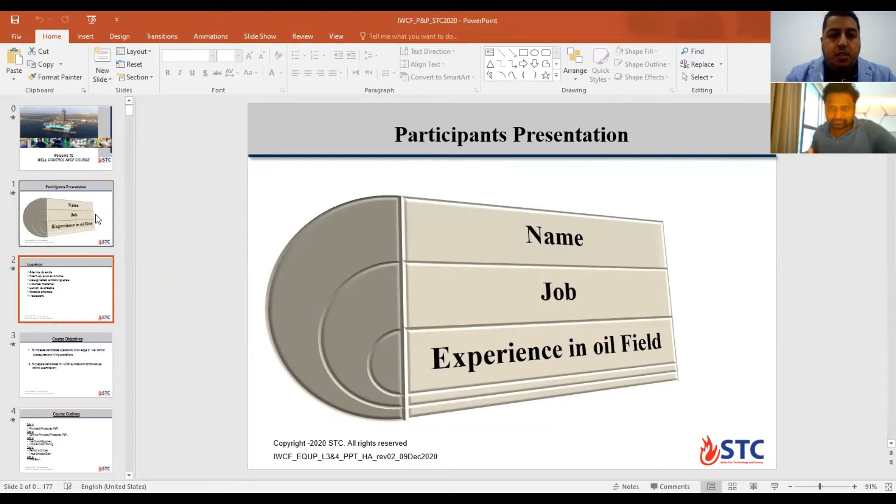This is well control IWCF level 4. We already made introductions about ourselves. Some logistics: the time will start according to Kuwait time, 9 a.m., and we will finish by 15:30. So total hours is 6.5 hours, including half an hour for lunch break.

Course material is with you. You need to have your passport during the exam for ID identification.

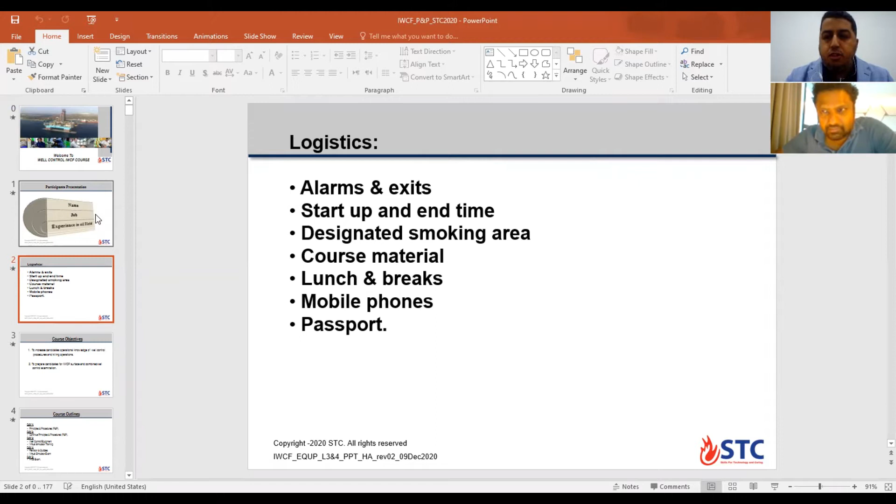What is the course objective? Why do we deliver or attend this course? First, to increase candidates' operational knowledge for well control procedure and killing operation - how to put the well under control, how to kill the well, and resume our normal operation. Second point, to prepare candidates for IWCF surface - our course is talking about surface and combined well control examination.

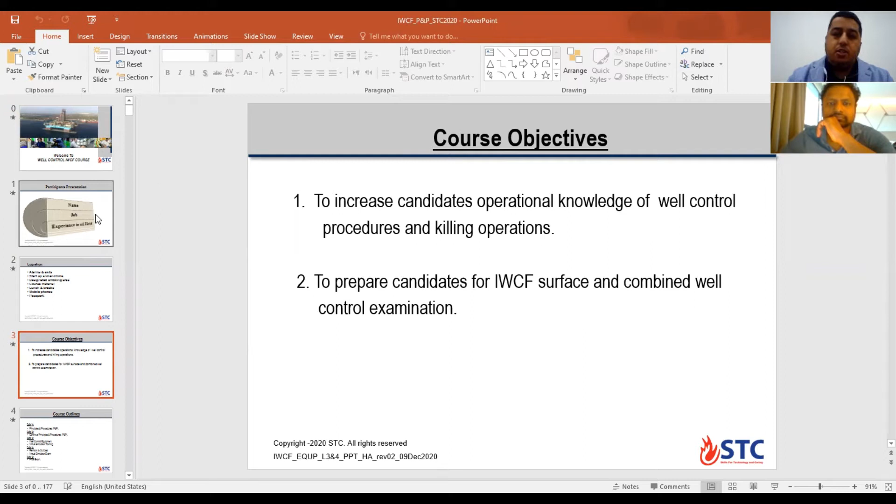Course outline: Day 1, today, for principle and procedure P&P. Day 2, continuing principle and procedure. Day 3, well control equipment - we will have virtual simulator training, well control simulator. Day 4, revision and quizzes in class, virtual simulator exam - you need to pass also with 70% to get your final certificate, along with the written or online exam. Day 5, the last day, will be the final exam.

And I think your exam will be online, right? Yes, it will be online. Okay.

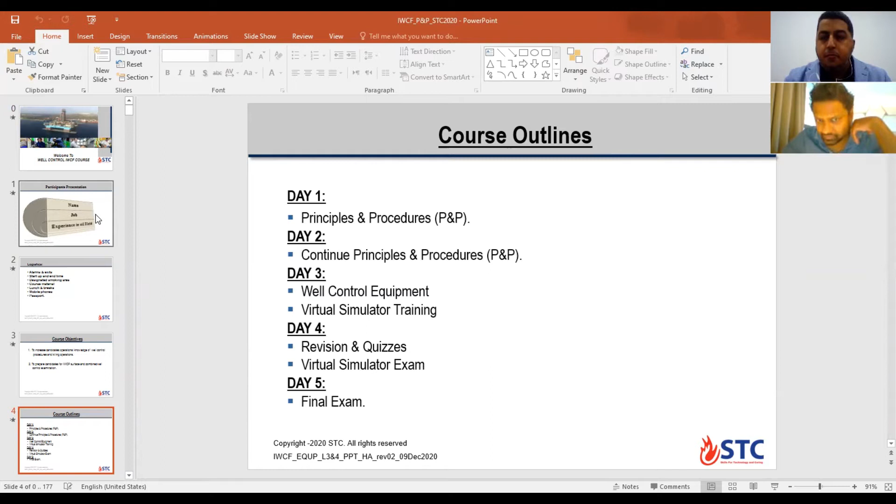First point, we'll talk about principle and procedure, P&P, well control barriers. Most of us working in drilling sites or drilling rigs know about what is a kick and a blowout. This is the definition, the most common one you hear at the rig site. What is a kick and what is a blowout? What do you think? Yes - kick is an influx, a blowout is an uncontrolled influx.

Thank you. A kick is an influx of formation fluid entering the wellbore and causing the well to start flowing. This formation fluid can be oil, gas, a contamination mixture between oil and gas, or formation water. So water can also be a kick.

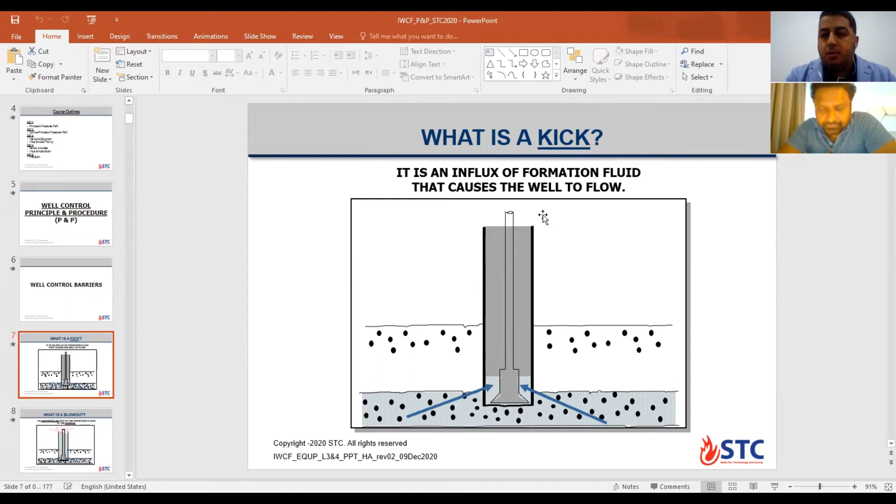Why does the fluid start to flow into the well? Because the hydrostatic head of the mud becomes less than the formation pressure. So the influx will be inside the wellbore but still under control - you can close your BOP stack at surface, read the pressure at surface, then convert this pressure into an increase in mud weight, and start to kill the well.

A blowout is an exit of formation fluid reaching the surface, out of control - an uncontrolled exit of formation fluid reaching the surface. You try to close your BOP stack but have failure in the BOP stack to control the pressure, so the oil and gas reach the surface without control. This is called a blowout case.

Normally, not all kick situations lead to a blowout. According to experimental data or experience in the oil field, only 10% of kicks, if not handled in a good way, can result in a blowout. The worst blowout in almost 11 years was the disaster in the Gulf of Mexico - the Deepwater Horizon semi-submersible rig.

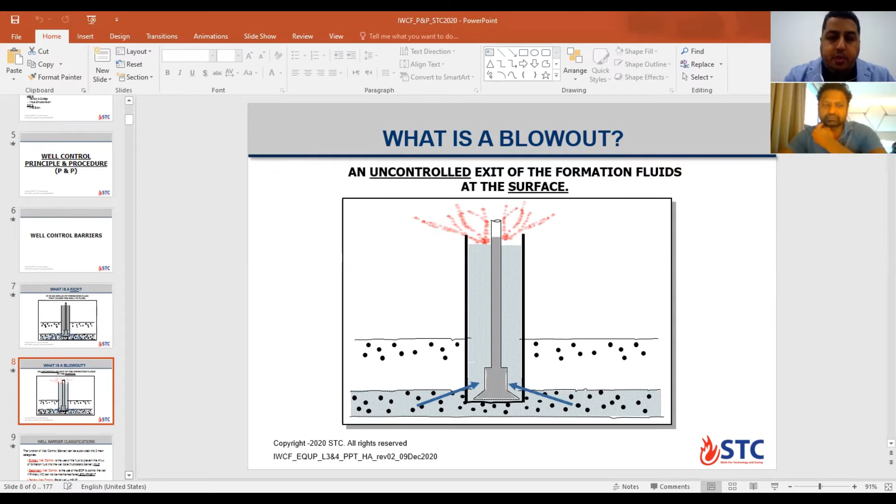Yes, correct. What is the barrier classification? Here we talk about barriers - something that can prevent the flow from the formation.

It can be divided into 3 main categories. First category, primary well control barrier, which is the fluid or the drilling mud, which prevents the influx from the formation coming inside the wellbore. This is called fluid barrier or hydrostatic barrier.

Usually when you're drilling, you drill with mud, and the weight or the hydrostatic head for the mud gives you pressure higher than your formation pressure. By minimum, according to the API, American Petroleum Institute, which puts some regulations, you have a minimum of 200 PSI overbalance. You need to have that minimum.

In some company policies, they can put more than 200 PSI according to the depth of the well, porosity and permeability of the formation, type of well, deviation, temperature downhole—a lot of considerations.

If you fail with the primary well control barrier, you switch to control the well with the secondary well control barrier. This is a piece of equipment called BOP, or blowout preventer. You will shut in with a pipe ram or annular to stop the flow and control the kick. At that moment, you record pressures at surface and convert these pressures to mud weight, increase your system with kill fluid, and start to kill the well with one of the killing methods we'll talk about later.

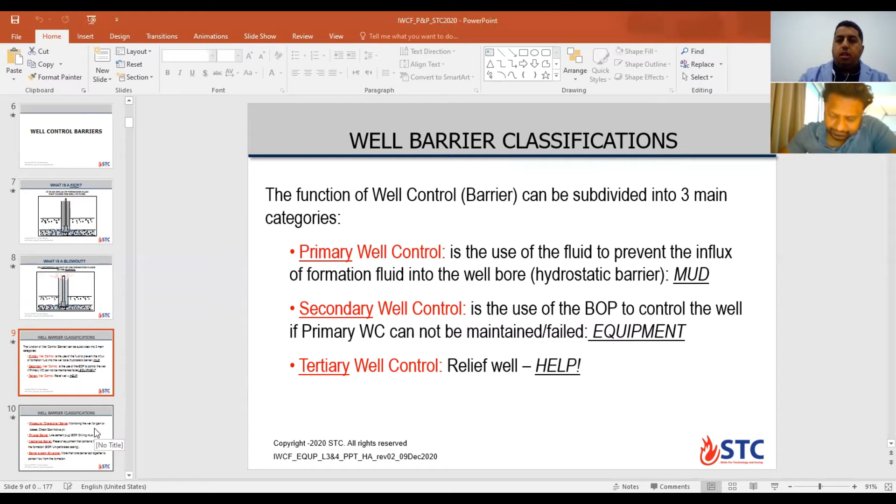Here's another classification, something called procedure or operational barrier. When you are monitoring the well for any gain or loss inside your tanks, checking active or gain in the tank—this is called operational or procedural barrier for your mud system.

Physical barrier, from its name, is something you can see or touch physically, like a cement block or BOP or drilling mud, if you can see it at the surface and the level is static. Mechanical barrier is a piece of equipment that contains the flow from the formation, like a BOP or unperforated casing.

Barrier envelope—what is the barrier envelope? This is a combination of more than one barrier acting together to contain the flow from the formation. Like when you are drilling, you have two: you have the hydrostatic head from the mud, and you have the BOP as a secondary barrier.

The same applies if you need to, for example, change the one ram in the BOP—you need to have one mechanical barrier plus your hydrostatic head from the mud. In some companies, they can add more barriers, but this is the minimum requirement: 2 barriers in place.

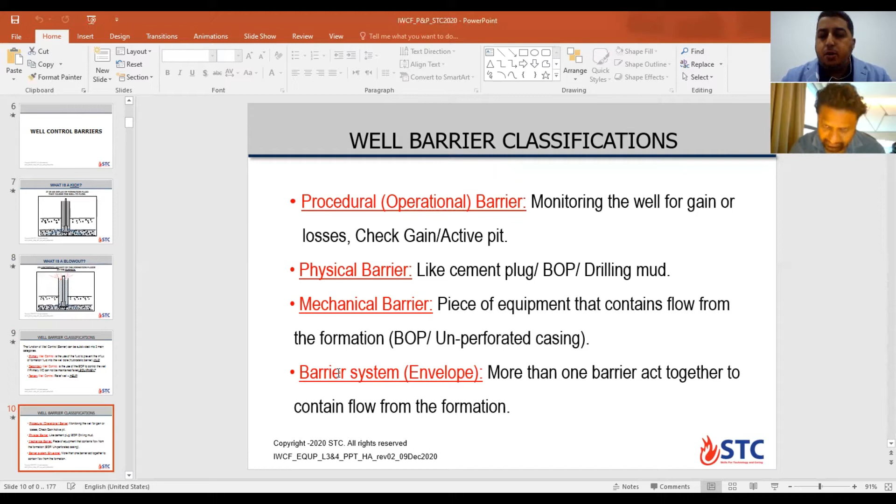How can we pressure test the barrier? The barrier will not be an acceptable barrier until it passes the test criteria or test requirement to be considered a barrier. The BOP on the rig, if you put it above the wellhead, cannot be considered a barrier until it passes the test procedures.

What is the way to pressure test the barrier? You have 2 pressure test types: one is called positive test and another is called negative test.

The positive test: you apply external source pressure on the surface side of the barrier, like a cement block or BOP, greater than the pressure from the bottom, from the formation side. At that time, your surface pressure plus your hydrostatic head column above the cement block in the well will be more than the formation pressure. So this way is called a positive test. You need to hold the pressure for at least 10 or 15 minutes on the chart to ensure the barrier is holding the pressure, so you can continue your operation.

In the other way, the negative test is sometimes called the inflow test, or in some companies the dry test. You do the reverse: you apply pressure from the formation side, the formation pressure, which will be higher than the hydrostatic head from the mud above the barrier. So this type is called negative test. How can we do this? You can displace the fluid above the cement block with a lighter fluid like water.

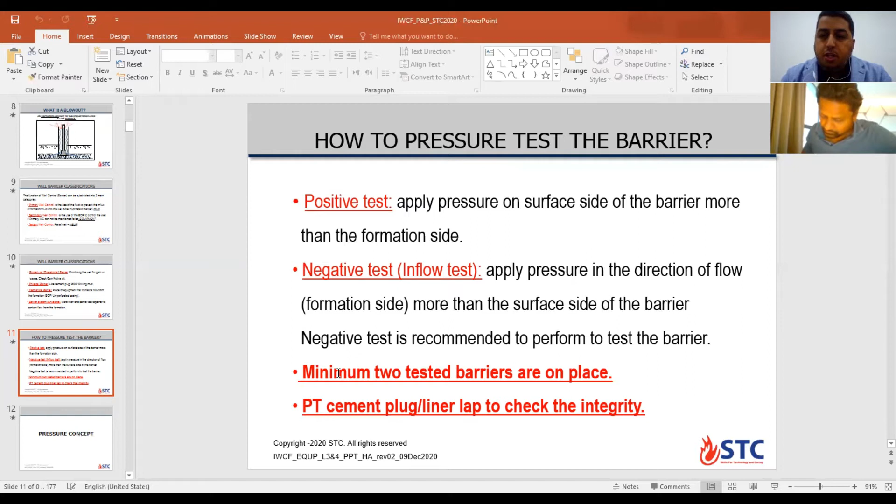We'll move to talk about pressure concept. What is the pressure we need to talk about? First, we'll talk about hydrostatic pressure, HP. Hydrostatic pressure equation, the units for this course, pressure will be in PSI, pound per inch square, equal to mud weight in ppg, pound per gallon, times TVD, true vertical depth, times factor K, which is 0.052.

This equation you will find in your formula sheet. Could you check your formula sheet? This is the first equation in the formula sheet, first page, number 1. Pressure equal 0.052 times TVD in foot times mud density in ppg. This is during the rest, during the static condition, without pump running.

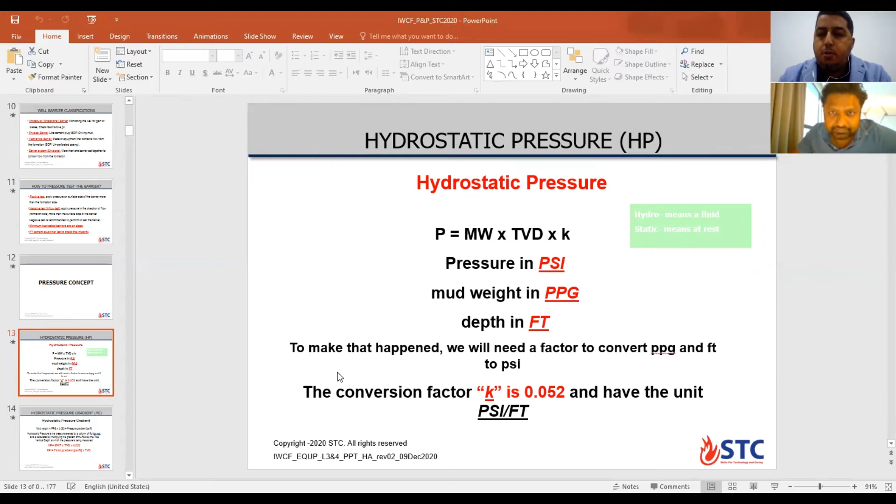So if you need at any point to measure your hydrostatic pressure, you need to know the true vertical depth, not measured depth, related to the pressure by 0.052 and the mud weight in the well.

Here we'll talk about hydrostatic pressure gradient. The gradient means the last equation, both sides divided by foot, so we'll get pressure for each foot true vertical depths inside the well.

This is the second equation: pressure gradient equals mud density times 0.052. The unit for pressure gradient is PSI per foot. This second equation is a general equation.

If you put fracture gradient in, you get the mud weight equivalent to the fracture pressure. If you put formation gradient in equation number 2, you get the mud weight equivalent to the formation. So it is a general equation.

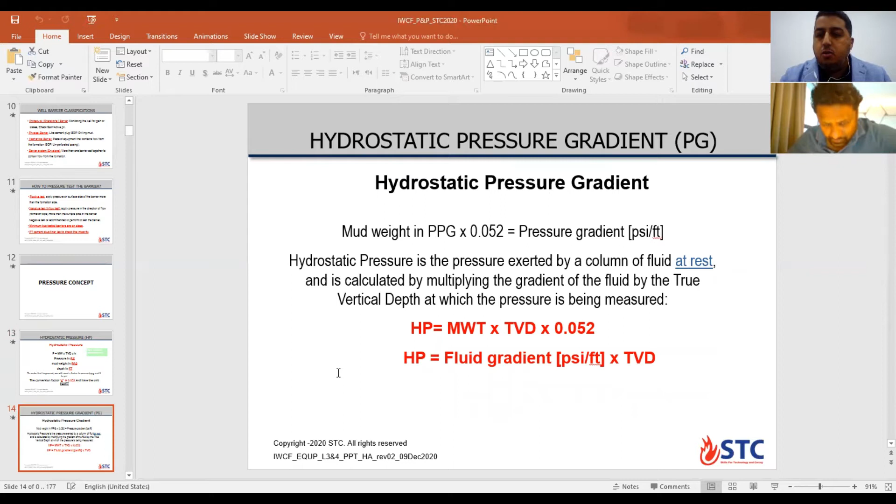If I give you PSI per foot times foot TVD, you get the pressure at each point inside the well. This is true vertical depth - the vertical distance between two points regardless of the volume inside the well container or the shape of the well.

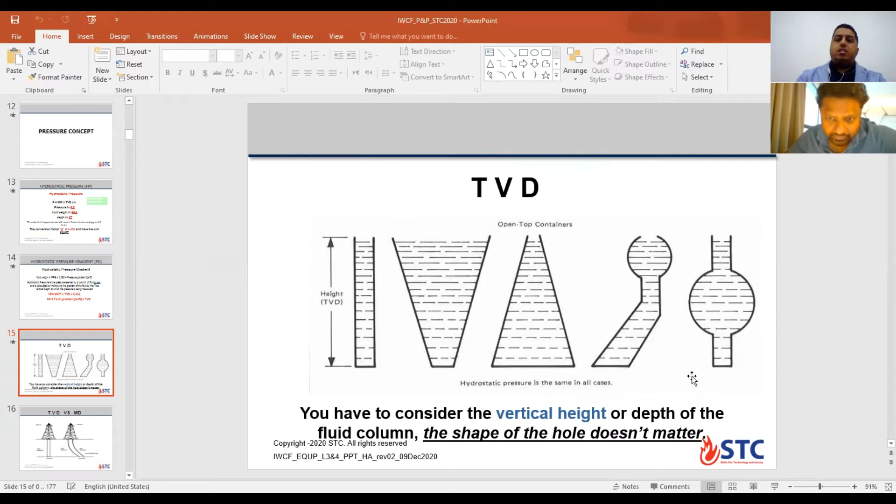If the container is filled with the same fluid density, at the same depth you will have the same pressure at that point. This is the difference between true vertical depth and MD, measured depth.

The measured depth, for sure, in highly deviated wells will be longer than the true vertical depth, because this is the length of the pipe laying on the side of the well.

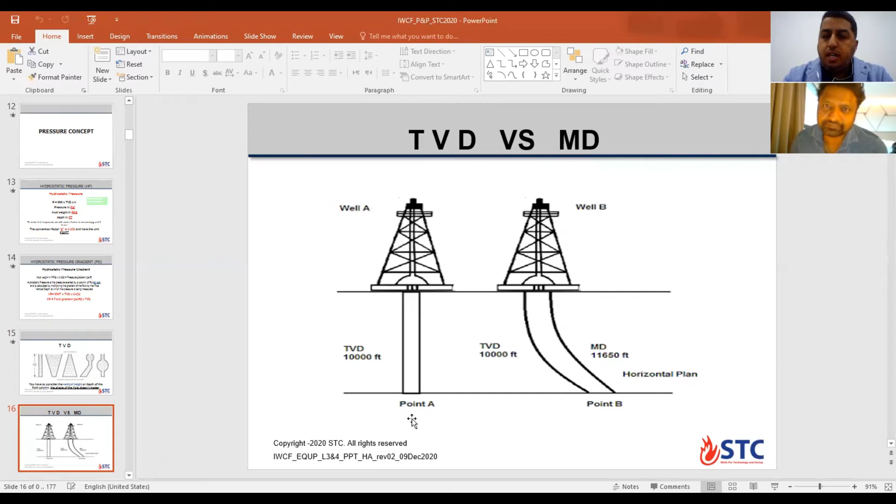So the measured depth is usually considered when calculating volume, strokes for the pump, and time for circulation. But true vertical depth we only consider for pressure calculation. Let's look at this exercise.

Example number 1: 10 ppg given, calculate pressure gradient. So it will be 10 times 0.052, giving you 0.52 psi per foot.

Example number 2: given 8,500 foot TVD, pressure gradient 0.65 psi per foot. Can you calculate the mud weight? From equation number 2, the mud weight.

Mud weight is equivalent to - you just turn the equation around. Pressure is 0.65... hold on, give me a minute. Pressure equals mud weight times 0.052, right?

The pressure gradient is given as 0.65 PSI per foot. 0.65 times 8,500 gives you pressure of 5525 PSI.

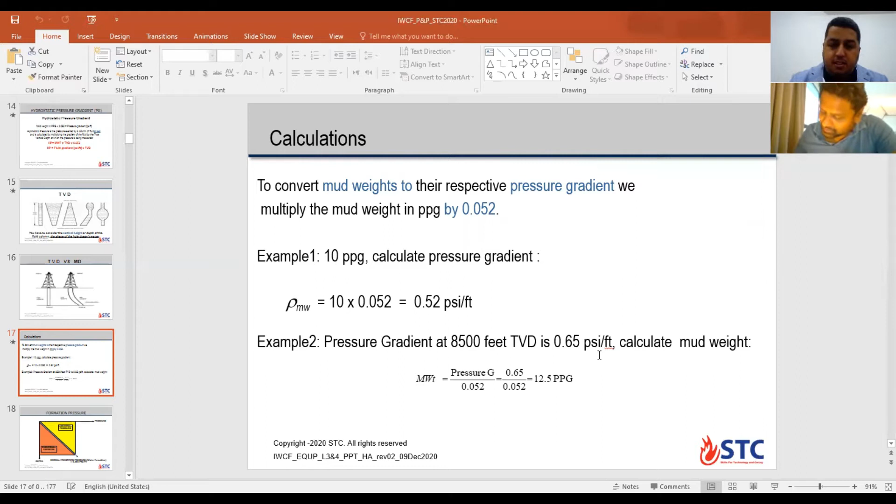What is the formation pressure? What is the definition of formation pressure? If we say formation pressure at this zone is 2000 psi, what does that mean?

You can say it's the overburden pressure plus the formation fluid pressure at that depth - that is the formation pressure. This is the pressure acting on the fluid trapped inside the pore space in the formation. It tells you how much pressure the formation has.

Usually 90% of formations worldwide contain water or salt water, formation water. We drill to get oil and gas from only 10% of the formations we drill worldwide.

According to calculations and measurements, the normal formation pressure, which is the water or salt formation, has a gradient equal to 0.465 psi per foot. If you drill in an area with formation pressure higher than this value, its gradient is higher, so the formation is considered abnormal pressure.

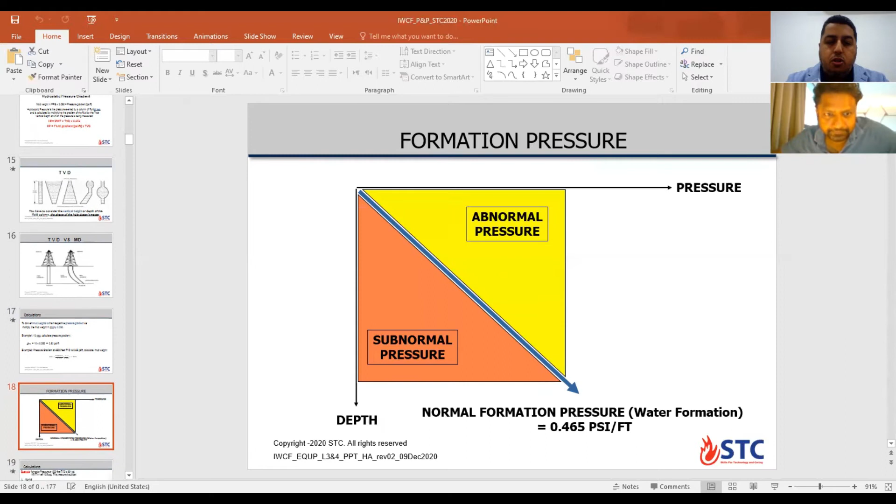So let's look at this calculation. Example number 1, please.

Formation pressure at 1,200 feet TVD is 601 psi. Mud weight: 601 divided by 1,200 gives you 0.5. The pressure for this formation should be calculated as 10 times 0.052 times 1,200.

624 psi. We need to know if the pressure for the formation is normal, abnormal, or subnormal. 624 minus 601 - am I right? No, you get your formation gradient as you calculated, and you compare it with 0.465 psi per foot.

If this value is higher, just take 601 divided by 1,200, you get 0.5008. So this value is higher, so it's not subnormal. It's slightly above normal, it's abnormal.

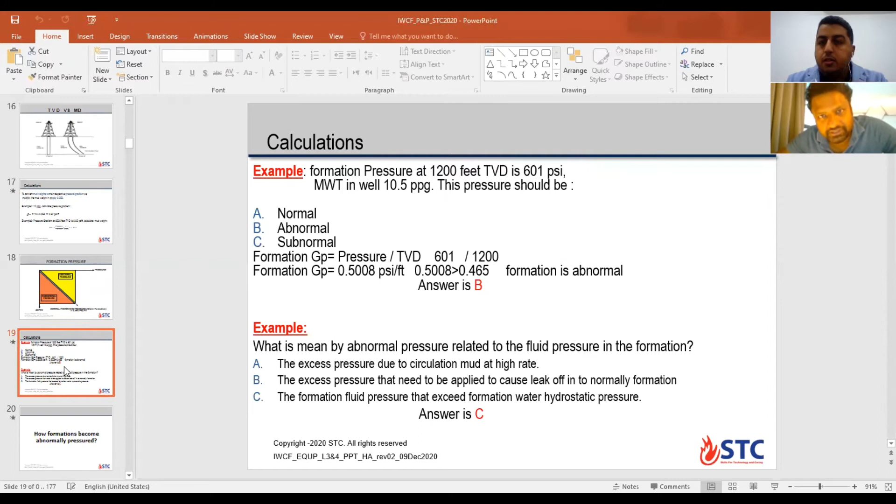This is the normal formation pressure. What can happen to the formation to convert or change from normal formation pressure water to abnormal formation pressure? Its pressure will increase.

What condition can cause this? This can happen according to geological conditions, or an earthquake or something like this - so no force from humans. This can happen naturally, converting your formation from normal formation pressure water to abnormal formation pressure.

This is the first reason for a kick, because increasing your formation pressure will decrease the overbalance in the well. So decreasing the overbalance means you can go to an underbalance situation, or a kick situation. So what do you think is the reason for that?

Trapped formation water, trapped gas, overburden pressure, different kinds of sedimentation, pressure of different kinds of reservoirs overlapping, like connate water or ancient water systems such as brine inside the formation, and gas and hydrates.

First, thank you. The first reason worldwide is under-compacted shale or sand. If you look here, the formation here is formation water. Normally, with increase in depth and compaction, pressure inside the pore space increases, so the water starts to release to the upper formation from the pore space. This is called the dewatering process.

But if you have a sealed area here, like this one, you will trap the formation or water inside the formation below this trap. So if your trend for your gradient, like here - the green one is normal - at this moment it will increase in the trend and convert to abnormal formation pressure. Abnormal pressure gradient, yes, correct.

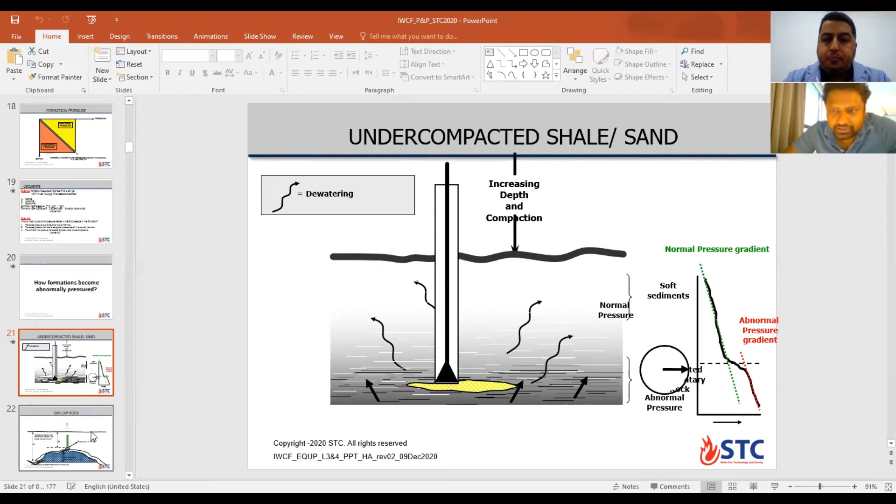Second reason, as you said, the gas cap rock. This is coming from seismic survey or exploration. You have natural gas in the rock, you have a sealed area or gas cap. A cap rock here, so you have gas inside the formation.

The gas, according to its density, is lighter than the formation, so it will migrate up to the top where the cap rock. So the formation from below or around starts to compress this gas to the maximum at the top point here. If you put your rig here and you are going to drill in this area...

Your formation is equivalent to 0.465 psi per foot, normal formation pressure, so you need your mud weight equivalent to this value. But if you put your rig here and try to penetrate the gas cap here, you need to check what is the pressure here, which is the maximum pressure at the top of the gas cap. So you need to increase your mud weight according to the pressure value here.

You need to give this value for the pressure, and this is one question for level 4 in the exam. You will get the pressure at the bottom of the gas cap first, which is normal formation pressure. Then you get the pressure inside the gas cap area, which usually has a gradient for the gas assumed at 0.1 psi per foot, multiplied by the length or height of the gas cap.

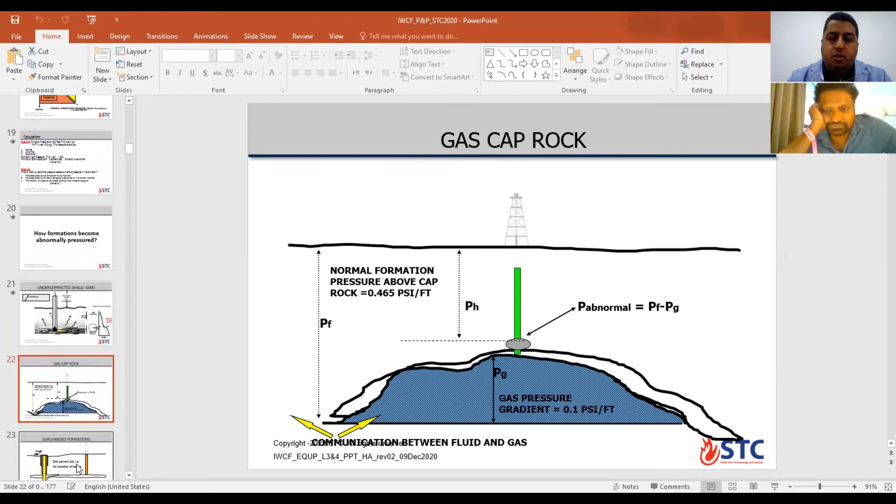The third reason is called surcharge formation. From its name, something charges the formation. If you drill one well and complete producing from it, that's the first well. If you have a bad cement job in the last casing behind the formation, and the lower formation has higher pressure than the upper formation, the lower formation will start to communicate with or charge the upper formation with pressure. So if you drill another well in this area, you'll get high pressure when you drill this zone because its pressure has become charged. This is a cause for kick situations.

Abnormal pressure - for example, if this pressure is 2000 psi with equivalent mud weight like 8.9, and it gets charged to 2500, you need to increase mud weight to overcome the kick situation.

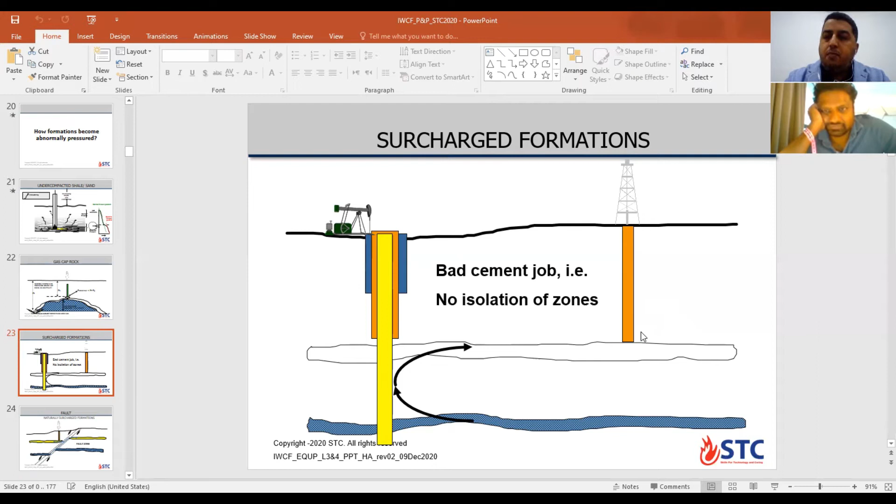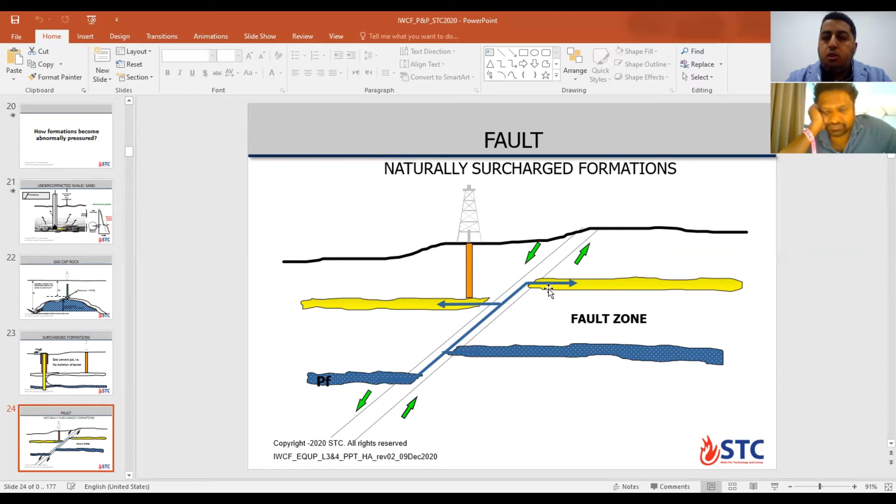Another natural cause is called fault. From earthquake or movement of the earth, or tectonic movement, you get a fault in the area. The formation becomes shallower in depth while keeping the same pressure inside. We need to consider this when drilling in a fault area. If you know this area has a fault, you need to keep your kill mud weight ready in the system while drilling through this transition zone or fault, to avoid taking any kick or blowout.

The last reason here is artesian well. What is an artesian well? You have a connecting zone - high porous sandstone with a continuous water source like a lake or rainfall. This lake charges your formation, connected downhole with pressure, and your rig level is lower than the level of the lake. So all the time you cannot overcome this difference between the two levels.

So if you are going to drill in this zone, you will naturally get flow of water from the formation. What should you do? You cannot drill the well with kicks all the time from this zone, so you should take action. How can you solve this problem or issue?

If you can drill through this zone, drill through it in this section, then go to the next section. So you can first consider running cement shallower to cover this zone - this is one solution, drilling through. But here your plan may change to have smaller casing at the end - instead of ending the well with 7 inch, you end with 4.5 inch, which will affect your production.

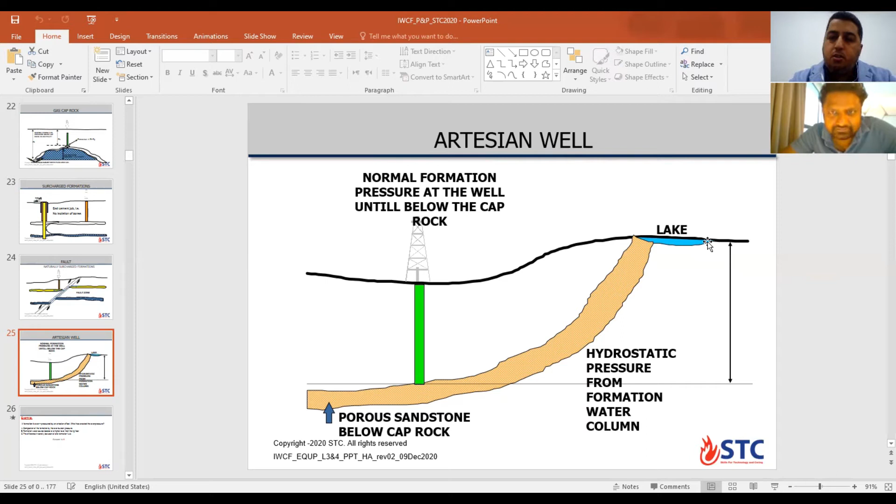Okay, look at this example.

Usually in IWCF exam or exercise, you can get asked multi-choice answer questions with 2 or 3 answers. This is artesian effect - meaning only B, right? But for your information, if you answer only 1 out of 2 correct, you will get 0 score. You need to answer both correct. That's why we need to focus on multi-choice questions with 2 or 3 answers. If you have 3 answers and 2 are right but 1 is wrong, you will not get any score. You will get 0.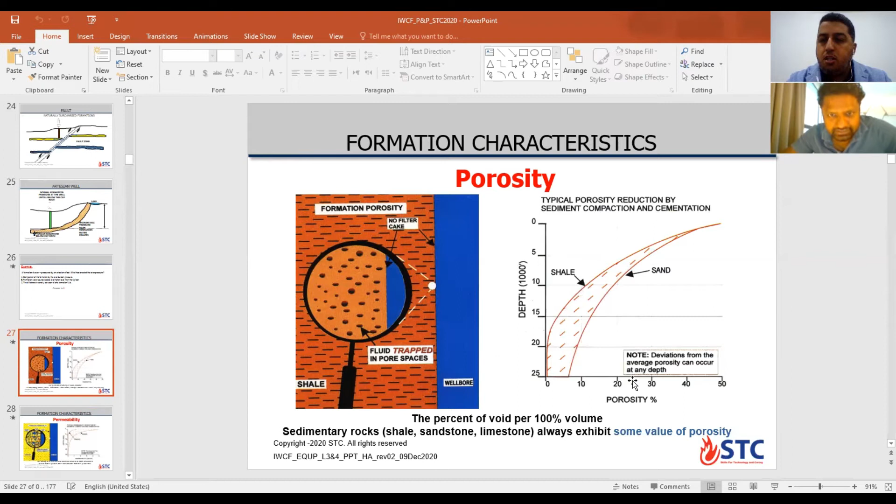Because if it's permeable, then you can lose fluids or cement. If it's porous, also same. And if it's permeable, you can have connection between anything in the reservoir and your wellbore. This answer is good for well design, for engineering course. It's not for well control course. For well control course,

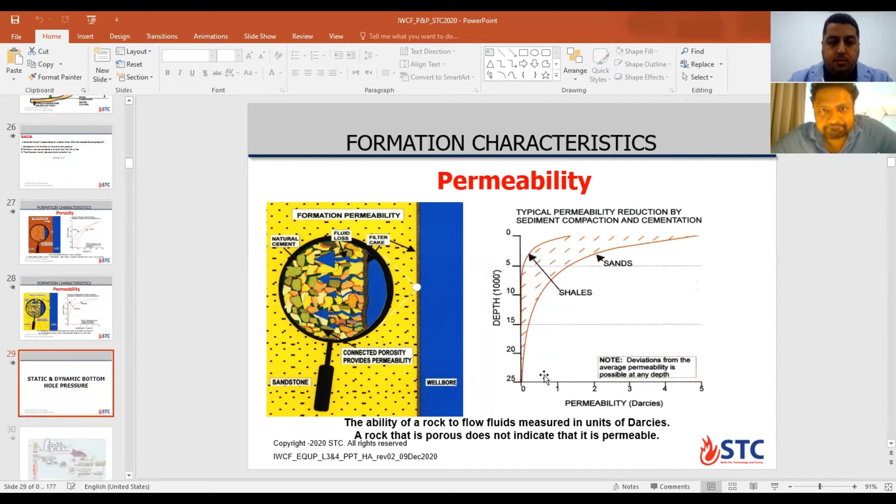After that, we'll talk about static and dynamic bottom hole pressure. When you start or stop your pump, what is read at the bottom hole for the well? What is the meaning for bottom hole pressure? Bottom hole pressure is the pressure exerted at the bottom of the hole because of the drilling fluid column, and any pressure exerted on that column with your pump switched on. That is dynamic. Static will be with your pumps off, just the column. Dynamic will be with your pumps on - the pump pressure plus the hydrostatic pressure will give you your bottom hole at the bit pressure.

This is the bottom - any pressure exerted on the bottom of the well. During static condition, it will be only equal to your column for mud weight. In dynamic, you will have annular pressure loss, APL, acting plus the hydrostatic head for the mud on the wellbore or formation. At shut in, it will be hydrostatic head for the fluid plus any surface pressure during the shut in situation.

Let's look here for the mud circulation system. This is the mud pump - it starts to take mud to the standpipe and then down the string, out from the bit back to the surface with 0 atmospheric pressure, back to the separation system, and back again to the active system.

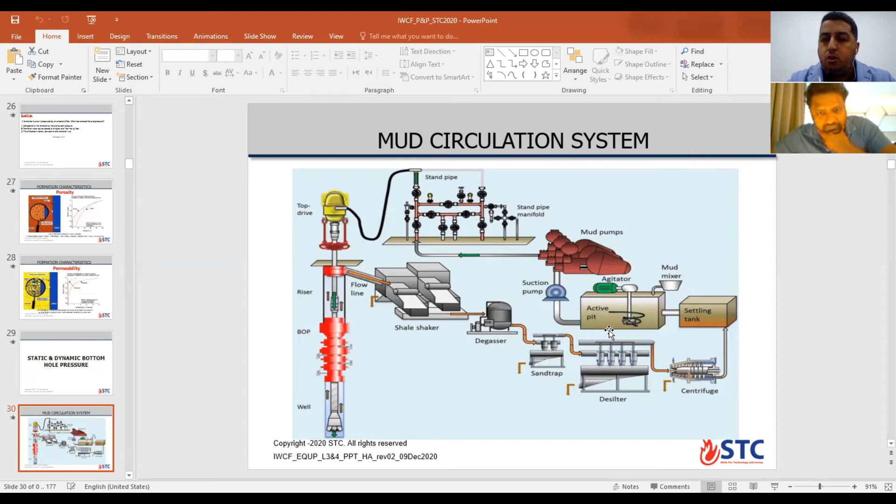This is a closed cycle to monitor any pit gain or loss during drilling operation.

Here's an example: you have a vertical well, 10,000 feet TVD, mud weight is 10 ppg, and the pump is shut off. If I put a gauge on the bottom in the static condition, what is the bottom hole pressure? Mud weight multiplied by depth, multiplied by 0.052, gives you 5,200 PSI.

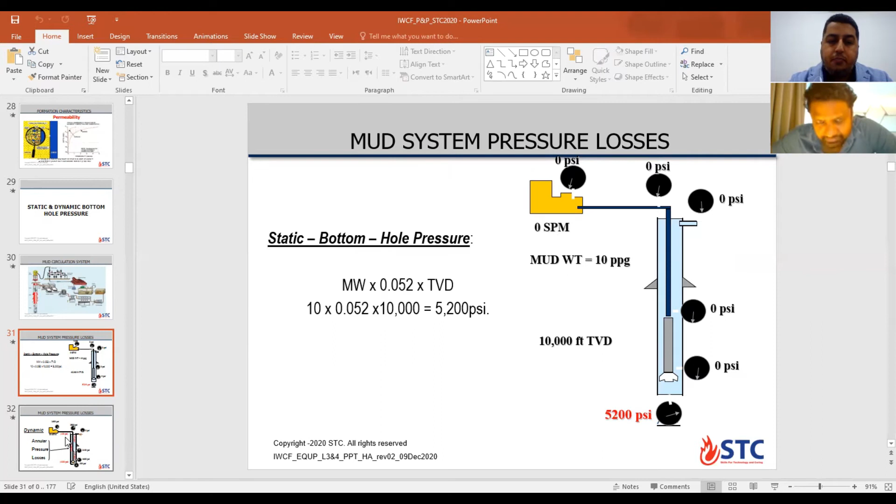If I start your pump, running at 80 strokes per minute, your pump pressure now reads 2,600 PSI.

I have a question: what is the meaning of pump pressure? If I say pump pressure is 2,500 or 2,000, for example, what does that mean? That is the gauge pressure at the pump output - the true value coming out from the pump. It's not including all the frictional losses down the hole yet. It's exactly at the pump exit - you're getting maximum pump pressure at the exit.

Why do we need this value? If I change the string inside the well, will this value change or not? No - sure, your pump pressure... it's a closed system, so your output should be fixed, right?

Let me ask another way. If I have 3.5 inch pipe in the well and I change it to 7.8 OD, will your pump pressure for circulation change or not? It will change - because your friction losses are different, your volume has changed.

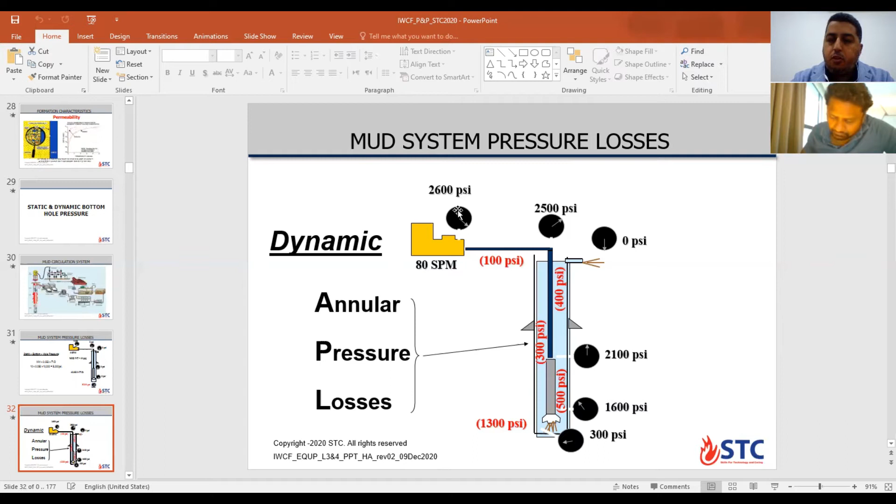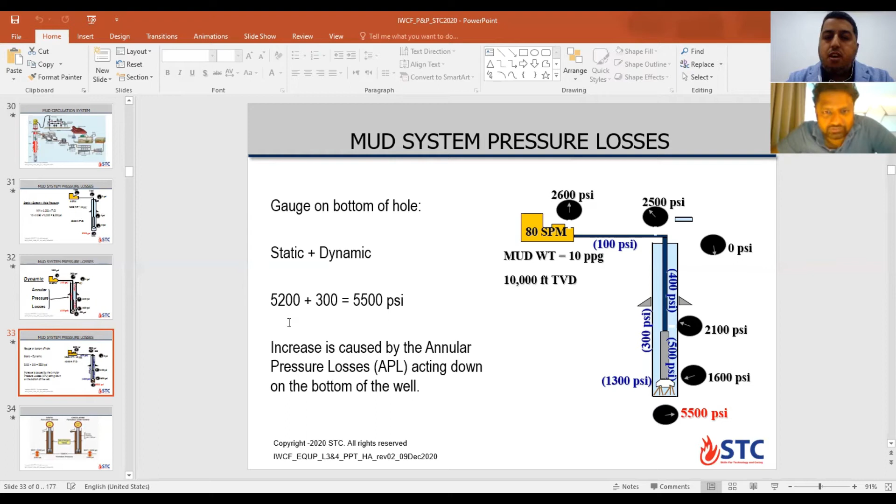I will put a gauge on this example at the bottom, and I need to know the bottom hole pressure during dynamic or circulation condition. It will equal the static column for the mud, 5,200 psi, plus the value of the APL, annular pressure loss. So your bottom hole pressure now has more pressure, equal to 5,500 psi compared to the static condition. When you shut down your pump, you lose your APL, it becomes zero, so you go back again to static condition, which is 5,200 psi pressure on the bottom.

Let's look at this example. You have formation pressure 5,300 psi in the same well, two conditions: one static without circulation and one dynamic condition. Bottom hole pressure here is equal to 10,000 feet times 10 times 0.052, which is 5,200 psi. Here, annular pressure loss is given as 250 psi, so bottom hole pressure is 5,450 psi. In the first situation, zero pump pressure, the well is under kick situation. But when you start your pump at 3,000 psi, your pump is running, your bottom hole pressure is under control, no kick situation.

You know the reason? Because you have the additional pressure, the equivalent circulating density, the ECD, is higher with your pumps on. When you start your pump, you have friction in the annulus called APL acting with more pressure on the bottom of the well. That's why when you are drilling, your tank at the surface is static, no loss, no gain. But when you stop your pump during drilling for any reason, you can see flow.

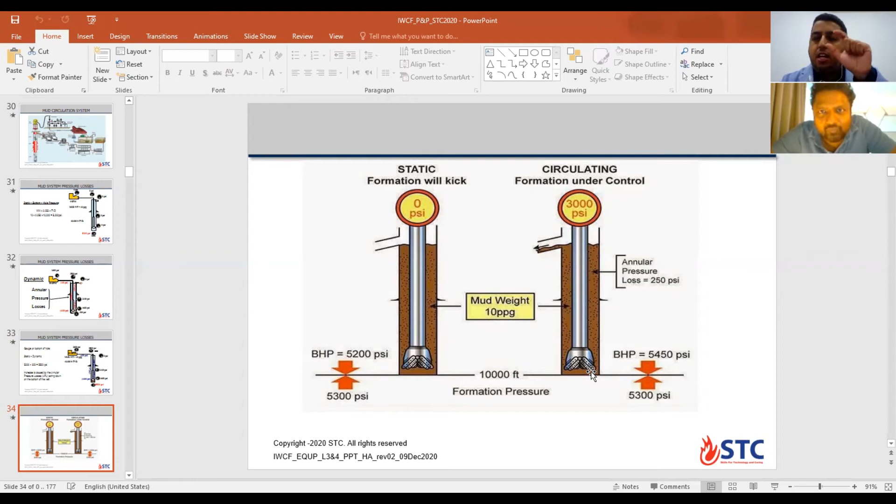From this point, you will have another definition, called equivalent circulation density, or ECD. This is an equation you will find in the formula sheet, number 7. Equivalent circulation density in PPG equals original mud weight plus the APL value, converted to mud weight, divided by TVD for the well, times 0.052.

According to well control, or the IWCF, if you are going to write the final answer for mud weight, you need to have only one decimal after the point mark as a final answer. So you can round it up or down according to what you are calculating. Now we are calculating ECD, so what do you think, round up or down? I will round up. Why? Because I will give myself some margin in case of any losses or friction losses or anything, because you need to be overbalanced over the formation pressure. You will be on the safe side, you have a safety factor.

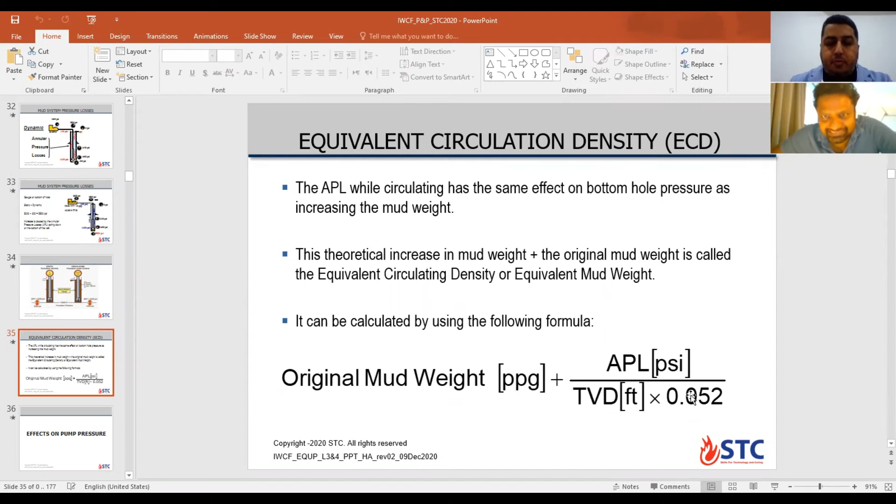Effect on pump pressure: what parameters can affect the pump pressure value? It changes with mud weight inside the wellbore. If I ask the mud engineer at the rig to increase the mud weight from 10 ppg to 11 ppg, what will happen to the pump pressure during the cycle after circulating? It will go up, because more mud weight means more viscosity, so more friction, so more pressure at the pump. The equation for that: P2, the new pump pressure, equals P1 old times new mud weight divided by old mud weight.

This is equation number 10, if you look at the formula sheet. This is an approximate equation: new pump pressure with new mud density equals old pump pressure times new mud weight divided by old mud weight. For example, at constant SPM, you hold your SPM, no change, so you only work with one parameter, changing the mud weight.

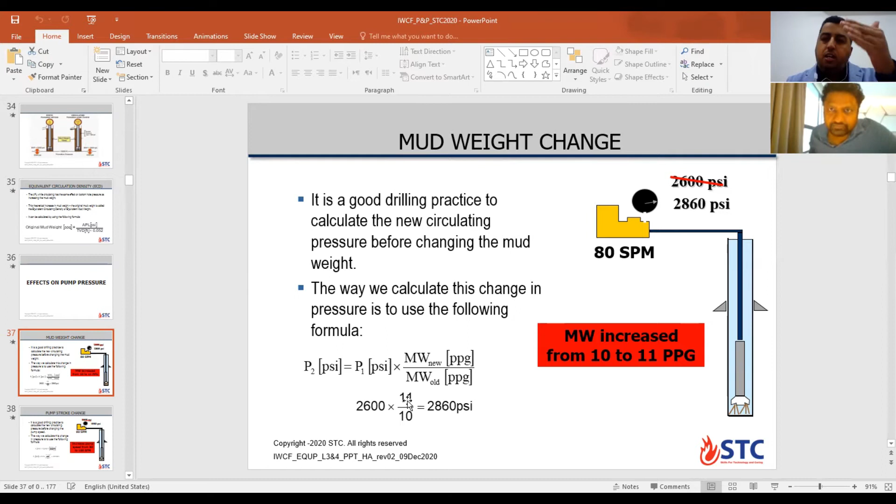Your old pump pressure is 2,600 psi, and you increase mud weight from 10 to 11. Can you calculate this value? Take 11 over 10, multiply by the old value 2,600: so 11 divided by 10 times 2,600 equals 2,860. Usually the pressure value will be a correct number without any fraction in the exam. But here the pump pressure is not a critical value—the critical value would be for kick or fracture pressure.

Another parameter you will change is your stroke rate for the pump—you will increase or decrease your pump rate. What will happen when you increase your strokes for the pump? That means more input into the well, more output, more friction in the system, so your pump pressure will jump up or increase. The approximate equation here is: pressure new equals pressure old times stroke per minute new divided by stroke per minute old, all squared. This equation is number 9.

Here we hold the mud weight constant—it will not change, and the strokes per minute is the only parameter we vary. Can you calculate that? Take 100 divided by 80, square it, then multiply by the old pressure, which is 2,600. That gives 4,062.5, so 4,063 psi.

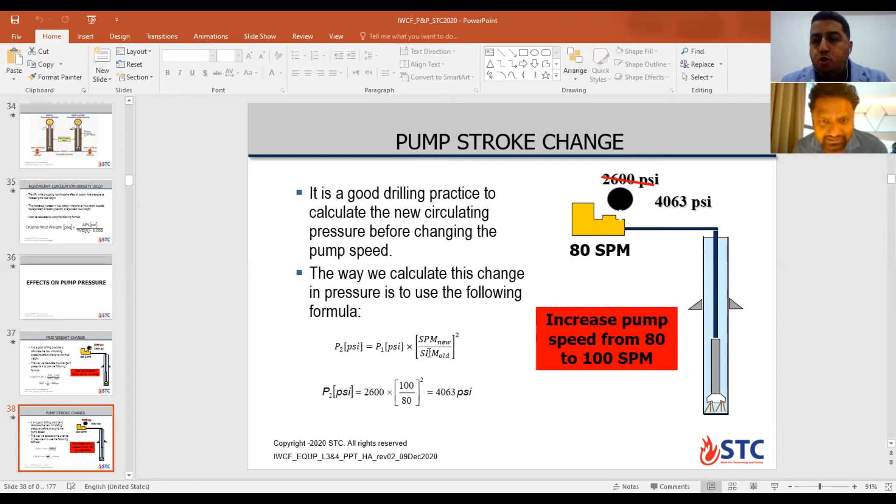If you reduce the pump rate to half, your pump pressure will drop to a quarter, because of the square in the equation. So if you double it, it will be 4 times, which would be too high. You can try this—this equation comes from trials actually done in the field, that's why it's called an approximate equation.

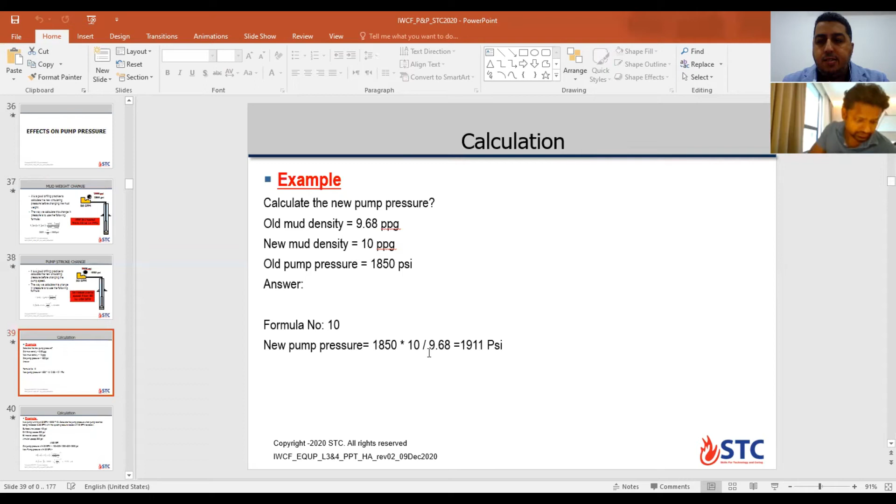Look at this example: calculate the new pump pressure given old mud density, new mud density, and old pump pressure. So it's the new mud density divided by old mud density, times the old pump pressure of 1,850, giving 1,911 psi.

Second example: mud pump running at 30 SPM, 10,000 TVD, find the new pump pressure when the pump rate has been increased to 35 SPM, with the system pressure loss at 30 SPM below the surface line being 100. So mud pump running at 30 SPM, going to 35—I need the new pump pressure at 35. It's 35 divided by 30, squared, times the old pressure. Where is the old pressure value? Hold on, where is the pump pressure... let's go to the equation.

I'm missing something here. Hold on, old pump pressure - he gave you the pressure loss at 30 SPM, right? Old pump rate 30 SPM, yes. The summation for the pressure loss is the pump pressure.

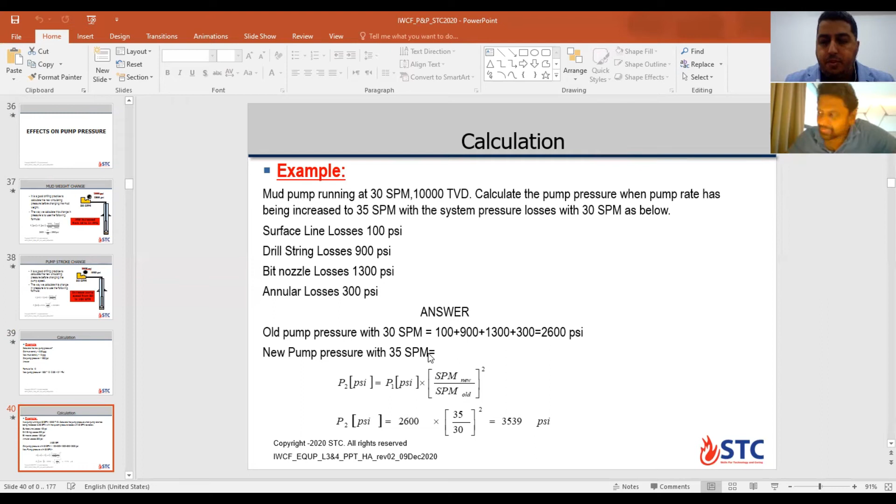After that, we'll talk about kick occurrence, when the kick can happen. The kick can happen in two conditions: when your formation pressure increases, your overbalance decreases and you go into underbalance situation, or your hydrostatic head column for the mud reduces for many reasons.

Here we'll talk about what can happen for the fluid column to be reduced. What is the reason to reduce the hydrostatic head for the mud? What do you think? Losses is one. Does any losses lead to kick situation? Yes, definitely. Any type of losses can lead to kick?

Not all. If you have a higher pressure zone above your drilling zone, and you're losing at the bottom, and going underbalance above, you can introduce an influx. So it's not all - it depends on how much you lose your level inside the well, compared to the formation pressure value. Correct. So this first reason is the losses.

Okay, what else? Failure to keep the hole full, gas cut mud - you have gas coming in, your mud weight is not true at the bottom anymore. Your 10 ppg is now becoming 9.5 ppg because of gas in the mud. What else? Formation fluids, same thing as gas - lighter fluid coming in. What else?

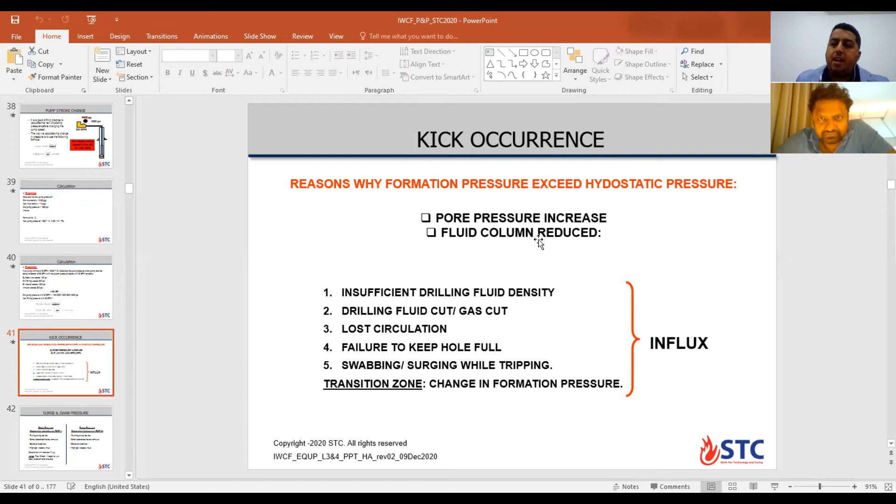About the surge and swab pressure - usually swab is called minus pressure or negative pressure, a momentary reduction in bottom hole pressure. The reason is pulling out too fast. You have a small clearance between your hole and your bottom hole assembly.

For your information, swab can happen in open hole and inside cased hole also. You have a balled bit or stabilizer, and you have high gel or viscosity mud. The high viscous mud will not give time for the mud to come in and fill the void space around the pipe.

How can you determine you have a swab inside the wellbore? For example, we're pulling out of hole 5 stands, and the hole is not taking enough fill. If you pull too fast, the fluid from the trip tank is not going in fast enough.

You determine it with incorrect fill up. Incorrect fill up means when you are pulling out of hole - for example, your trip tank was 50 barrels. After 5 stands, you must fill the hole with, for example, 5 barrels. If you find the tank at 45 barrels, that means everything is fine, the hole is static. But if you pull 5 stands and your tank becomes 47 only, that means you took 3 barrels instead of 5 to fill the hole. In this case, you know that you have swabbed a kick, or swabbed gas, inside the hole or wellbore.

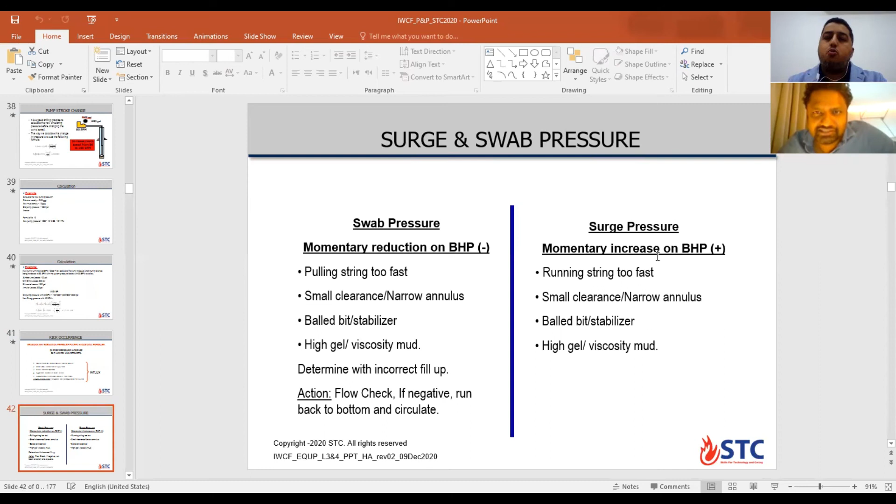No, it's not good - you will fracture the formation. If you have a loose zone or weak zone, you will exceed the fracture pressure. You fracture the formation and after fracturing you have losses. From losses, you have a drop in your hydrostatic head, and then you may go underbalanced and have a kick. That's why surge and swab are both related to kick occurrence.

Okay, now we'll talk about wet and dry tripping, from a well control and safety view. What is the best option to go out of the hole - with wet or dry tripping? What do you think? The best way is to trip wet. Trip wet - what does that mean? To trip wet, you slug... wet means you don't slug the pipe, you don't dry the pipe. You trip with the mud in the pipe and pull out slowly. This is the meaning of wet. Dry is when you slug the pipe and pull. So what is the best? I think wet is best.

Let me think - wet and dry tripping. If you dry trip, you slug the pipe and pull, then it becomes like a plug, right? You might swab. If you wet pull, your pipe is wet, so the pressure is balanced inside and outside. Am I right? So if you pull wet, it should be better - you don't swab the formation. You don't swab the formation if you pull wet. If you dry the pipe and pull, you can end up swabbing the formation if you pull too fast.

Actually, that's not correct. Let's rephrase the question. Compare wet and dry tripping. If you pull 5 stands wet and 5 stands dry, how much mud will you lose in each case? You will lose more mud from the well in wet or dry tripping?

So dry tripping means when you pull out of the hole, you only lose the thickness for the metal, called metal displacement for the pipe. You need to compensate this value - only displacement loss. But when you pull wet, you lose the internal capacity of the pipe plus metal displacement. That's two losses.

Two losses. For dry tripping, your pipe is empty from inside. So the volume you need to add from the trip tank to the annulus, while running the trip tank all the time during pulling out, equals only the cold open-end displacement, or metal displacement, or steel displacement.

OD squared minus ID squared, divided by 1029.4, gives you barrel per foot for the metal displacement. Usually in the exam or exercise, the number will be given to you directly - you don't need to calculate it. Okay, this is for dry tripping.

Also, according to safety, it is safer for personnel or crew on the rig floor to pull dry, so you don't make the rig floor wet and you don't break pipe on surface, especially if you are working with oil-based mud, where the risk of slippage is higher.

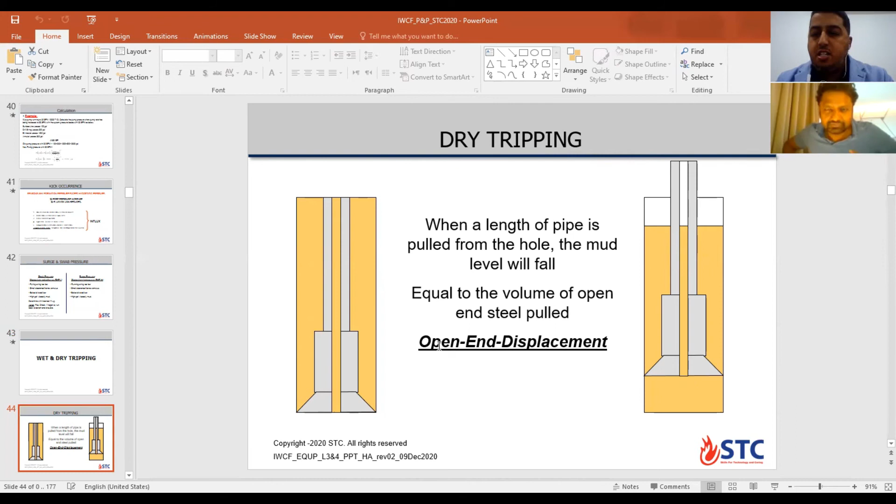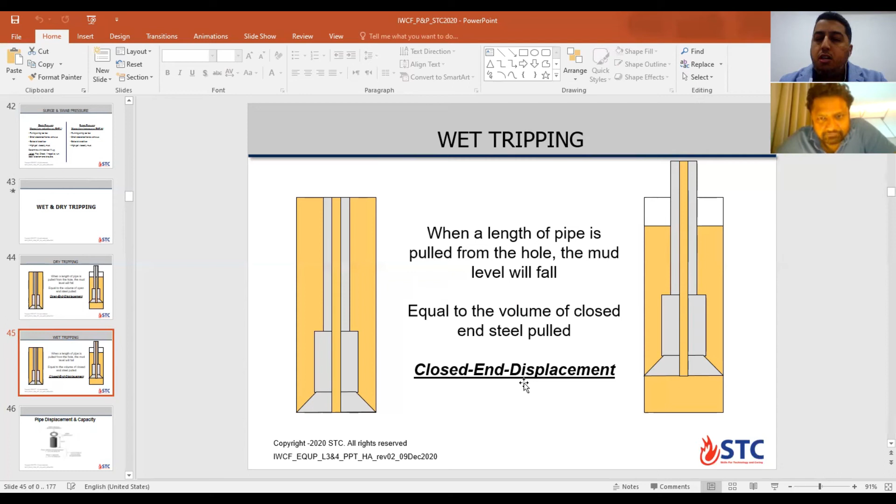With wet tripping, for each stand you pull out, you need to compensate in the well the closed-end displacement, which is internal capacity plus metal displacement. If you look here, this is the cross-section in the pipe - this is the capacity, and this is the metal displacement. Pipe metal displacement plus pipe capacity gives you the closed-end displacement.

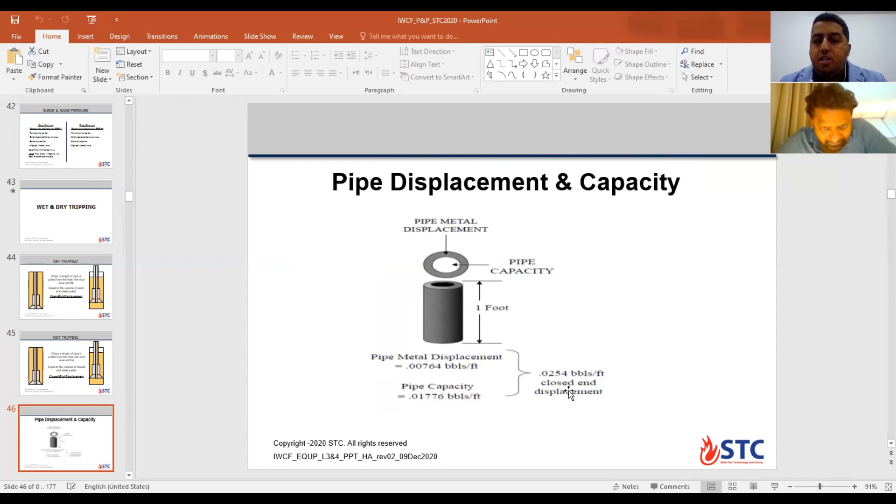Closed-end displacement. Trip tank - this is usually a small tank, capacity 20 to 50 barrels. Usually on the rig you have two trip tanks: one for oil-based mud and one for water-based mud.

The trip tank usually runs during the tripping operation. So when you are going to trip out, you start your trip tank pump. There's a line sucked from the tank, from the fill line down to the annulus while pulling out your string, and the return or flow line brings the fluid back to the same tank. This is a closed cycle while pulling out or tripping in.

This measures the tank for losses or gains during tripping, the same as the active tank in drilling operations. You have measurement here to track the float or level inside the tank. The level starts to drop when tripping up or out, because you're compensating the metal displacement or closed-end displacement inside the hole. While tripping in, the metal displacement comes out, so the level increases inside the trip tank. From this tank calculation or measurement, the driller can maintain a trip sheet to monitor the tank during the tripping operation.

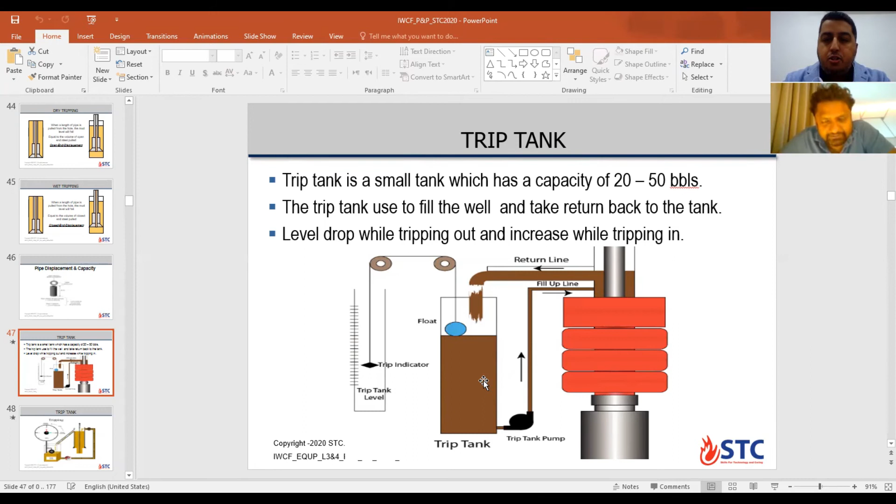For example, you are tripping out of the hole, your pump is on all the time, lined up to the annulus to fill the metal displacement, and the measurement returns to the same tank. If you start with volume 15, and after pulling 5 stands you lose, for example, 5 barrels, you will finish at 10.

For example, if the driller, after pulling 5 stands, finds the trip tank at less than 10 barrels, what does this indicate - loss or gain? Losses. That means below 10 indicates more volume has been taken by the formation.

For example, if you are pulling out 5 stands and this volume you find is 12 barrels, what does this indicate - kick or losses? I mean from 15, you drop to 12 instead of 10. What does this indicate?

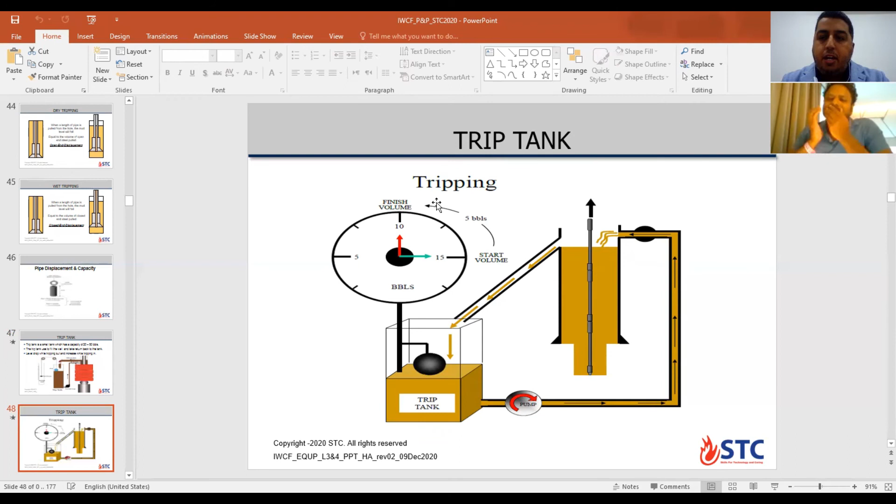But this trip sheet is very important at the rig location. It should be filled by the driller, checked by the company man and tool pusher, and filed in the rig filing system.

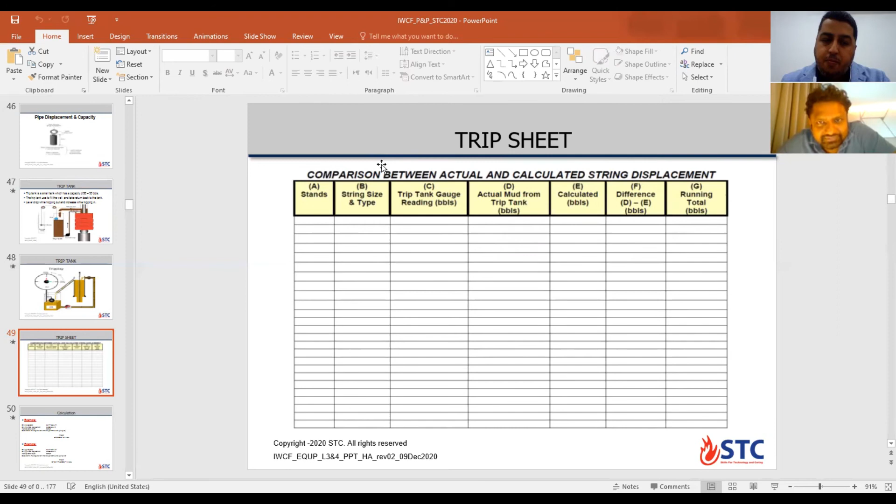Okay, let's check these 2 simple calculations. First one: calculate the mud required to fill the hole per stand when pulling dry. This is the drill pipe metal displacement.

So it's only displacement. You take 93 feet and multiply by the metal displacement 0.0083. That gives 0.77 barrels, almost 1 barrel.

Example number 2: calculate the mud required to fill the hole per stand when pulling wet. So that's both capacity and displacement, 0.01776 plus the displacement 0.0083. You get that multiplied with 93 feet, giving you 2.4 barrels if you're pulling wet.

Can you check your formula sheet, equation number 19? In the formula sheet, equation number 19 is pressure drop per foot tripping dry pipe. When you're tripping dry pipe, how much pressure drop per foot? This equation equals drilling mud density times 0.052 times metal displacement, all divided by casing capacity minus metal displacement for the pipe. This is the first equation. Some questions or calculations can come in the exam for this.

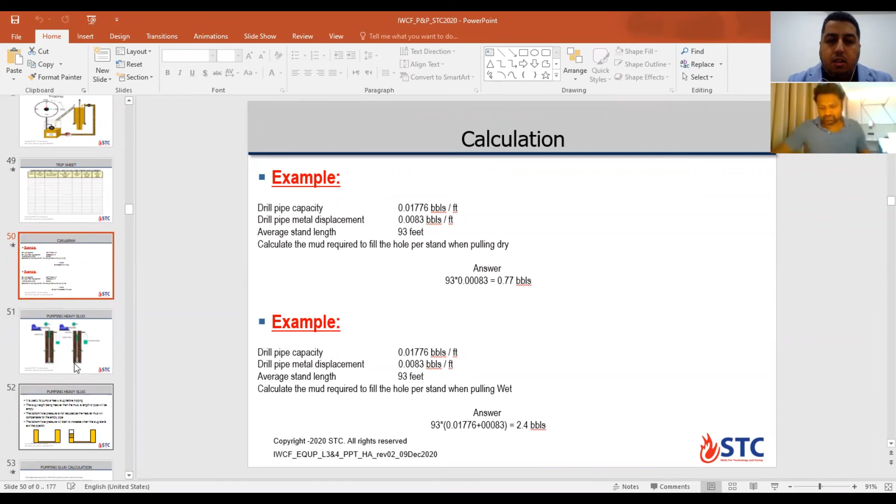So if you are drilling with a motor assembly, you have a float valve in the string. So how can you go up or trip out? You need to pump a heavy slug inside the drill string. This is the benefit of pumping heavy slug.

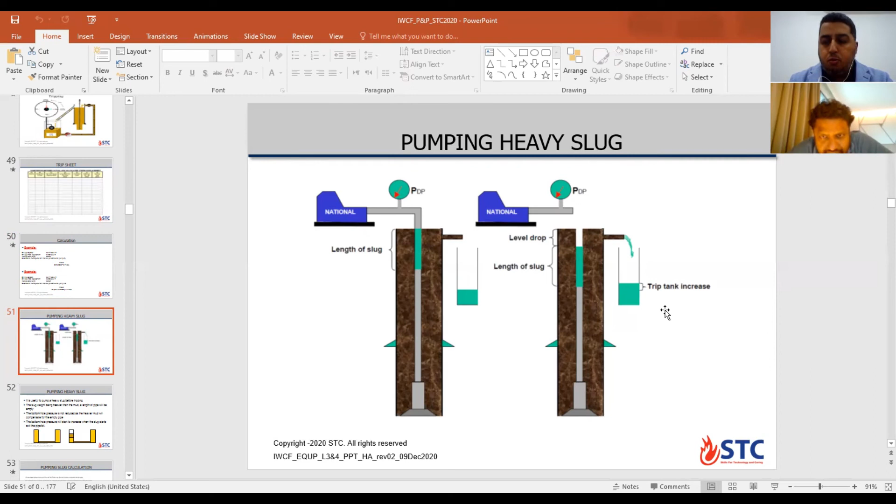Here it is useful to pump heavy slug before tripping. The bottom hole pressure will not reduce, as the heavier mud will be compensated for the empty pipe. Bottom hole pressure starts to increase once the heavy slug is coming out from the bit to the annulus. This is the start, you have effect on bottom hole pressure.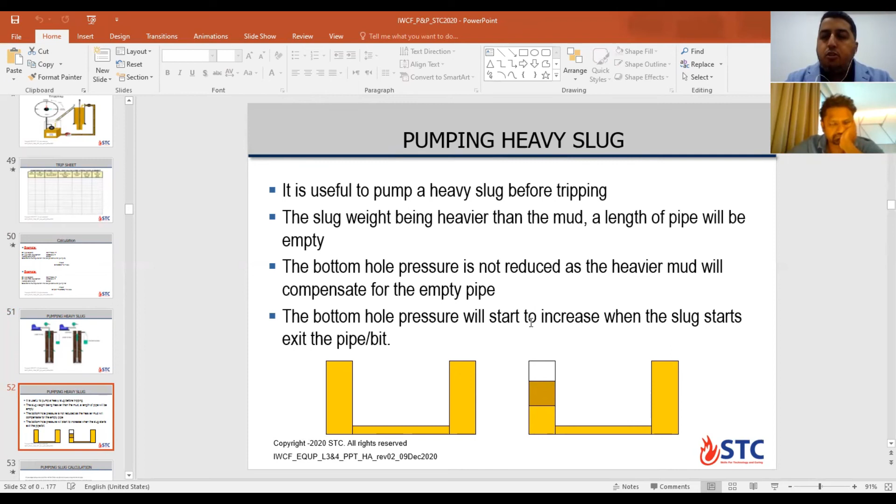Could you check these two examples here, please? You need to calculate the volume for a slug. So this is equation A, equation number 26, right? Yes, 26.

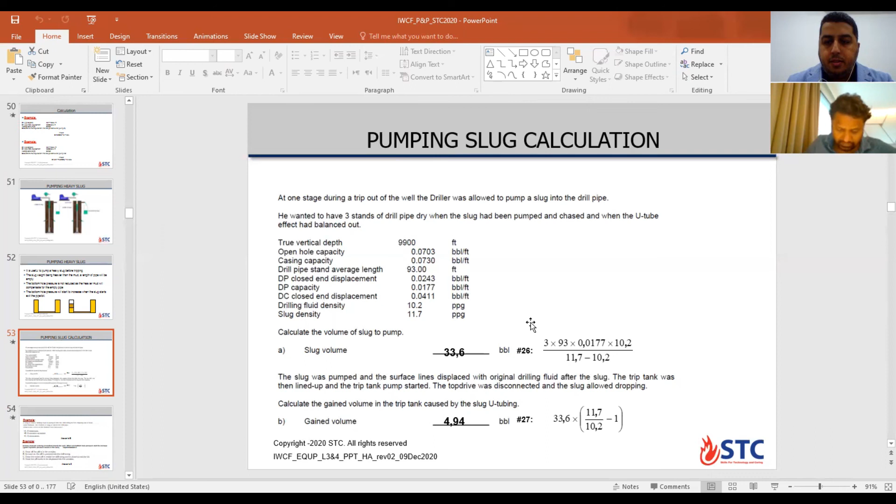Slug density 11.7 divided by mud in the hole 10.2, minus 1, times 33.6, gives about 4.94, almost 5 barrels. Okay, check these two examples.

A slug of heavy drilling mud is pumped into the drill string before tripping out of hole. After balancing, the bottom of the slug is still in the drill pipe. What is the effect on bottom hole pressure? Still nothing - it remains constant. Okay, example number 2.

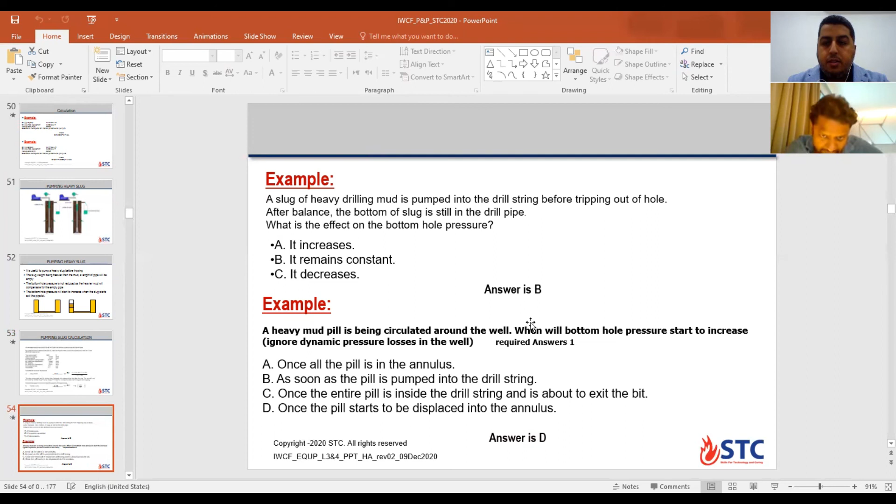Heavy mud is being circulated around the well. When will bottom hole pressure start to increase? Is it the pressure loss in the well, when it exits the bit, once it starts to displace into the annulus, or once it goes out into the annulus? Yes, after that - once it starts exiting the drill pipe at the bit.

Now we'll talk about kick warning signs or indicators. You see these when going into the transition zone between normal and abnormal formation pressure. The driller, during drilling operations, can notice certain parameters or warning signs. It gives an indication you may go - not must - into a kick or underbalanced situation. That means he needs to increase his awareness and his crew's awareness to notice if a real kick situation is developing.

These kick warning signs or indicators can happen during drilling, tripping, circulation, or connection time. During drilling, these parameters indicate you may or might go underbalanced - you're not sure, it's just a warning indicator. Like driving a car fast, you'll see a signboard saying slow down. If you drive fast, it doesn't mean you'll have an accident, but it may lead to one. That's the meaning of these indicators too.

The first indicator while drilling: you'll see your ROP, rate of penetration, increase - a sudden jump in ROP with the same parameters constant, meaning you don't increase weight on bit, RPM, or pump rate. When the driller goes into the transition zone, the ROP will jump fast, like from 50 feet per hour to 70 or 80. This indicates you may be going into high or abnormal formation pressure.

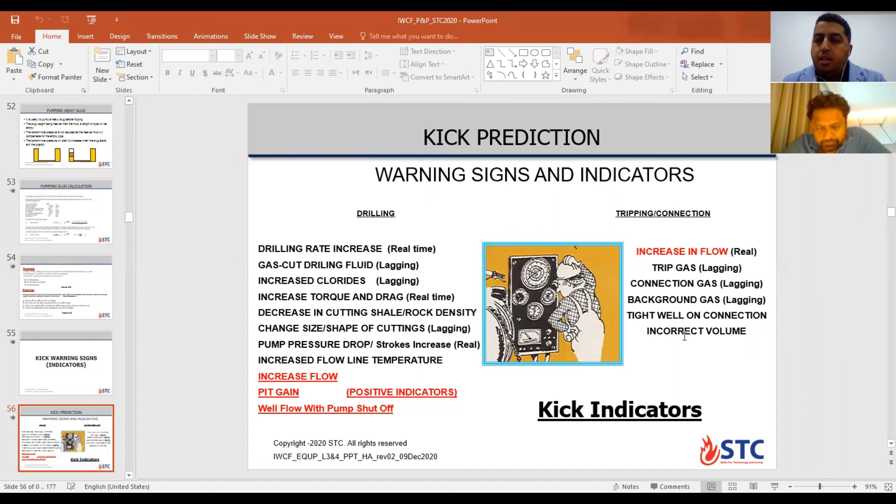And the last thing is incorrect volume from trip tank, indicating kick or swab during tripping. Clear? Okay, let's look at these two examples please.

Which of the following are indicators that a well might be going underbalanced? Two answers. You need to answer here. Yes, two answers for going underbalance.

One is B, a significant increase in pump pressure - nope. A change in the size and shape occurring - yes. D. B and D. Don't forget to check how many answers we need.

Example number 2: Which of the following should be considered as a kick indicator? Decrease in the drilling fluid flow from the well - no. Increase in drilling fluid density - no. Increase in solid content - no. Increase in drilling fluid flow from the well - yes. D. D and E. Okay.

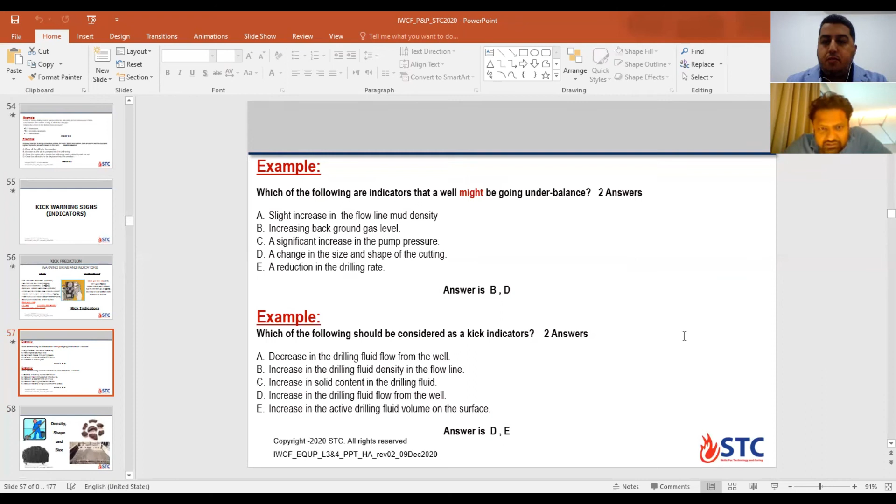D is a positive indicator. This one, the shape and size and the volume for the cutting - in some wells I know we have a lot of cutting, that's why we said this is a warning sign only.

To monitor by shaker man all the time, the shale shaker needs to give a call to the driller first. The driller, as the first man, needs to be informed of any change in the mud system or in cutting size or shape to react against the kick situation.

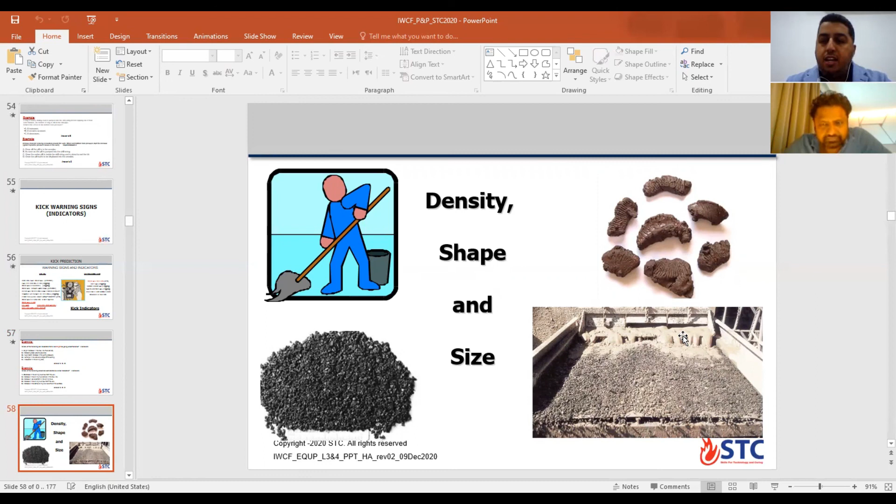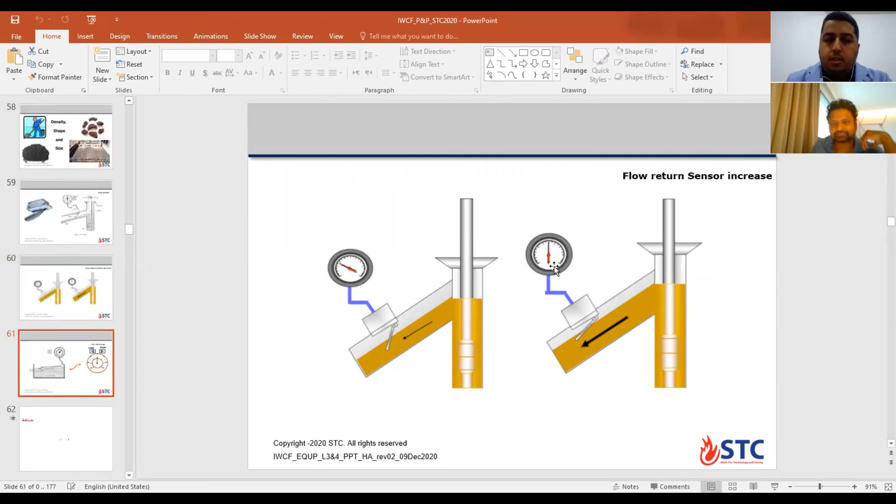If the difference here increases, it gives an alarm to the driller at all times. Please keep the alarm on in the driller's console, so it gives an indicator for the driller if there is loss or gain. Don't rely only on this sensor - you rely also on the tank level from the measurement, visual measurement.

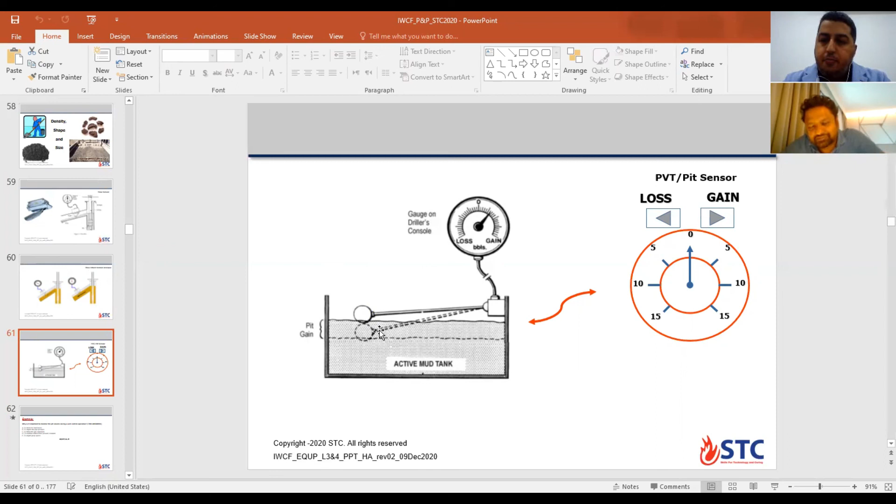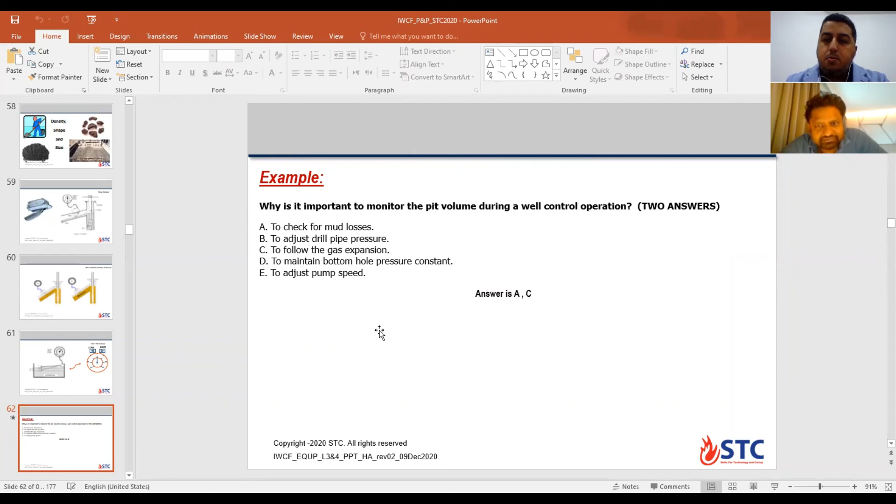To check mud losses - A is one, A is sure, to check for mud losses. B, no. C, to follow the gas expansion - maybe, yeah, C also. Why C? Pressure constant - when the gas starts to expand, it will push more mud out during the killing operation, so we need to measure the tank to follow this expansion, this migration.